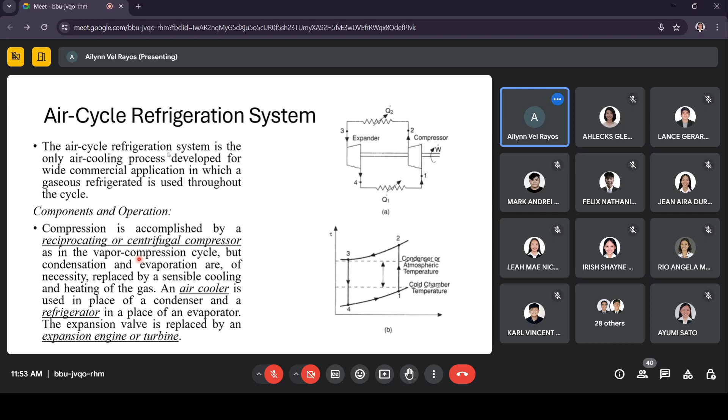So the air cycle system is ideally suited for use in aircraft because it is light in weight and requires less space than the vapor compression cycle. One disadvantage of the air cycle is that it is not as efficient as the vapor compression cycle. Air cycle refrigeration may be designed and operated either as an open or closed system.

In a closed or dense air system, yung air refrigerant natin is contained within the piping or component parts of the system at all times, with the refrigerator usually maintained at pressures above atmospheric. While in open system, the refrigerator is replaced by the actual space to be cooled, with the air expanded to atmospheric pressure, circulated through the cold room, and then compressed to the cooler pressure. Such a system is inherently limited to operation at atmospheric pressure in the refrigerator.

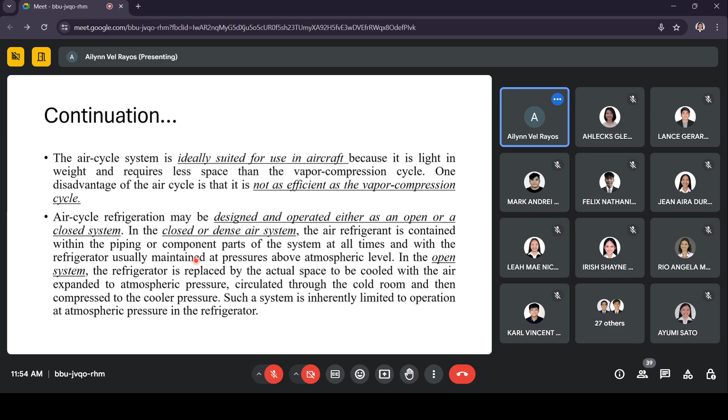So yung ating system components, kailangan tandaan para aware kayo kung ano yung nangyayaring process sa cycle. For our air cycle refrigeration system, we have process 1 to 2 in our compressor, isentropic compression. Depende din, kasi minsan polytropic compression yung given. But in this case, we have isentropic compression.

For 2 to 3, we have constant pressure rejection of heat, where the air cooler is. From 3 to 4, isentropic expansion where our expansion engine is. And 4 to 1 is the refrigerator where our refrigerating effect takes place, dito na-add yung refrigerating load. Its corresponding TS diagram clearly shows the constant entropy process 1 to 2 and constant entropy 3 to 4.

Since our refrigerant is air, we have to consider ideal gas equation to solve unknown values, unlike standard vapor compression cycle where we use tables and charts. So we will not use any tables or charts for this. You have to memorize the value of specific heat at constant pressure of air and the gas constant of air to get different properties, and you will use ideal gas equation.

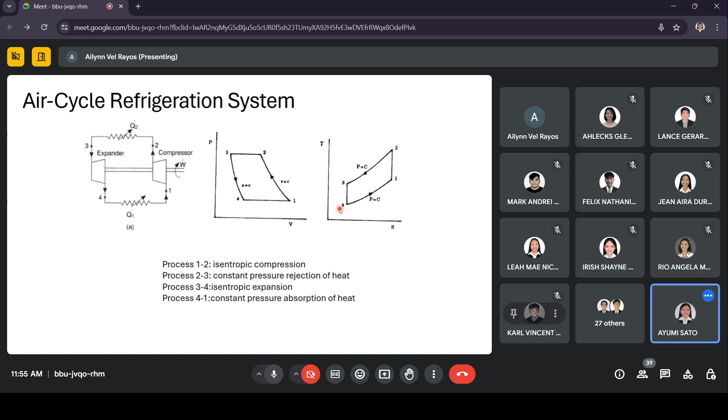Ayun, okay. Sige. So next naman natin is the analysis of air refrigeration cycle. So this is analysis per component na. So start natin sa ating refrigerator, we have constant pressure addition of heat. So in order for us to get heat, pag constant pressure, we'll use MCP delta T. So again, MCP delta T yung gagamitin natin since this is process 4 to 1. So change in temperature, MCP times the change in temperature. So make sure that you used a specific heat of air, which is 1.0062 kilojoule per kilogram Kelvin.

So next naman natin also heat exchanger, which is cooler. So this is where heat is being rejected or pinapalamig niya, or pinapababa niya yung temperature ng air natin after compression. So that is MCP delta T. But take note, yung temperature natin is change in temperature dun sa ating heat exchanger na air cooler. So T2 minus T3. So you also have to take note the units. So M natin is kilogram per second. CP natin is kilojoule per kilogram Kelvin. Nandito naman siya sa taas. And temperature, take note that temperature should be in absolute temperature.

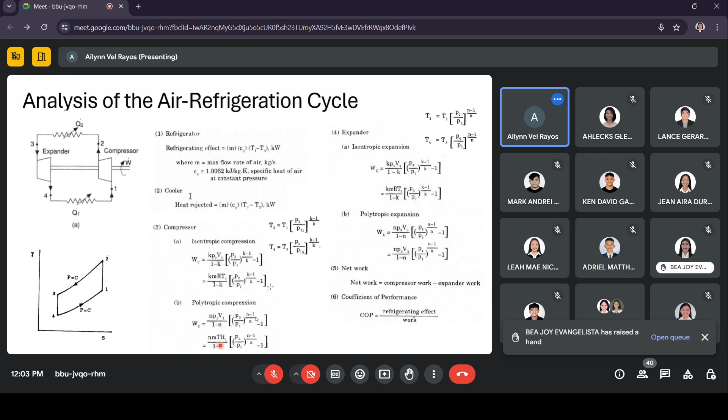Can you please read this, Bea Joy? Kasi nakataas ikaw ng kamay. May question ba ikaw? Bea? Ay, wala. Okay. Pero yun, pabasa lang ng problem na to.

An air refrigeration system operating on a closed cycle is required to produce 50 kilowatts of refrigeration with a cooler pressure of 1,550 kilopascal and a refrigerator pressure of 448 kilopascal. Leaving air temperatures are 25 degrees Celsius for cooler and 5 degrees Celsius for refrigerator. Assuming a theoretical cycle with isentropic compression and expansion, no clearance and no losses, determine A, the mass flow rate, B, the compressor displacement, C, the expander displacement, and D, the COP.

So, leaving air temperature is 25 for cooler. So, meaning T3 yun kasi leaving air cooler. So, outlet yun, which is T3. So, 25. And then 5 degrees naman outlet ng refrigerator, which is state point 1. So, again, don't forget to convert it into absolute temperature para hindi kayo magkakamali sa inyong solution. So, you can use yung ating mga formulas kanina to solve this problem.

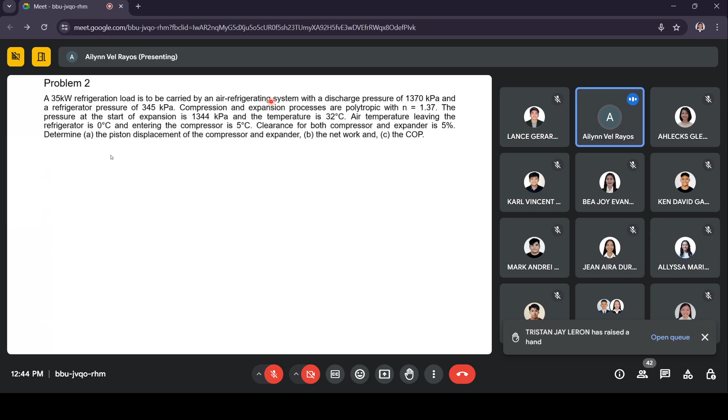Okay, so we have compression and expansion process. Both processes are polytropic with n equal to 1.37. The pressure at the start of expansion, so that is at state point 3, kasi expansion process is 3 to 4. So start of expansion is state point 3, which is 1,344 kPa, and the temperature is 32 degrees Celsius.

So air temperature leaving the refrigerator is 0 degrees Celsius. So kung mapapansin nyo, meron tayong state point 5 kasi iba yung temperature ng pagkalabas ng ating refrigerator bago pumasok ng compressor, naging 5 degrees Celsius siya. So there is an increase of 5 degrees from process 5 to 1, pero yung refrigerator natin is only process 4 to 5. So that is the process that you should consider in computing kapag it involves refrigerator.